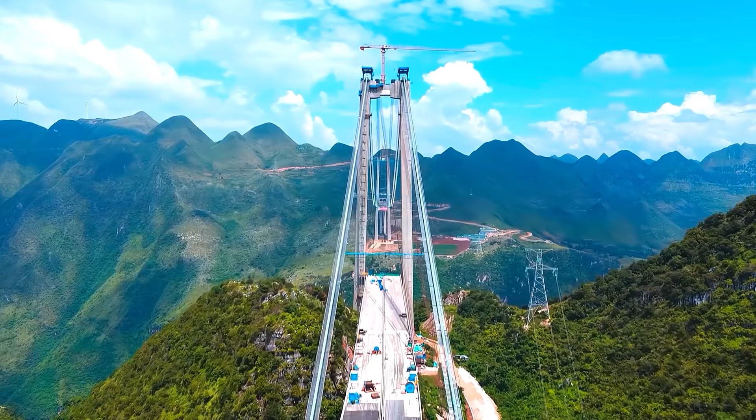Let's put this bridge's height into perspective. At 2,051 feet above the canyon floor, the Huajiang Bridge stands taller than 3 Washington monuments stacked on top of each other. If you dropped a bowling ball from the deck, it would take nearly 11 seconds to hit the ground. That's enough time to read this entire sentence twice. But this comparison only scratches the surface of what makes this bridge a true engineering wonder.

The bridge's location itself tells a fascinating story. Situated in China's Guizhou province, it spans one of the deepest canyons in Asia. The region's terrain is so challenging that for centuries, entire communities remained isolated from each other, separated by these natural barriers. Local legends tell of villages that could see each other across the canyon, but required a full day's journey to actually meet. The project began in 2013, with many experts claiming it couldn't be done.

The first challenge was simply surveying the site. Teams had to rappel down the canyon walls to take measurements and soil samples. Several geologists refused the job, calling the cliff faces too unstable. But a determined team pushed forward, spending 3 months mapping every inch of the canyon.

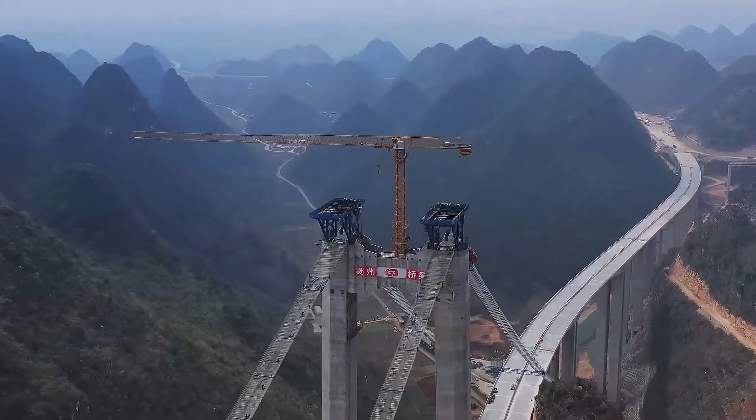But height isn't the only thing that makes this bridge extraordinary. The construction story behind it reads like an engineering thriller. The team faced 3 major challenges that nearly made this project impossible. First, the wind. At this height, gusts can reach speeds of over 100 miles per hour.

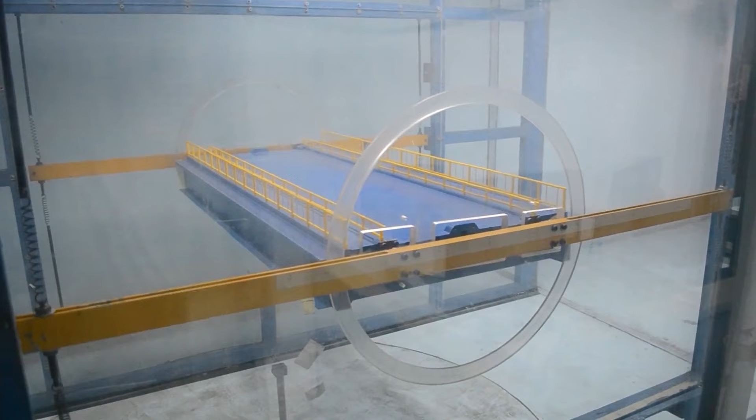Engineers had to design a deck that could handle these forces while staying stable enough for vehicles to cross. They developed a ground-breaking aerodynamic design that lets the wind pass through special vents, reducing pressure by 40% compared to traditional bridge designs. The testing phase alone took 6 months, with engineers using advanced wind tunnels to simulate every possible weather scenario. In one dramatic test, a scale model was subjected to hurricane-force winds for 72 continuous hours. Previous designs failed within the first day, with miniature sections buckling or twisting. The final design stood firm, swaying less than half an inch at the center span, a movement practically imperceptible to drivers crossing the actual bridge.

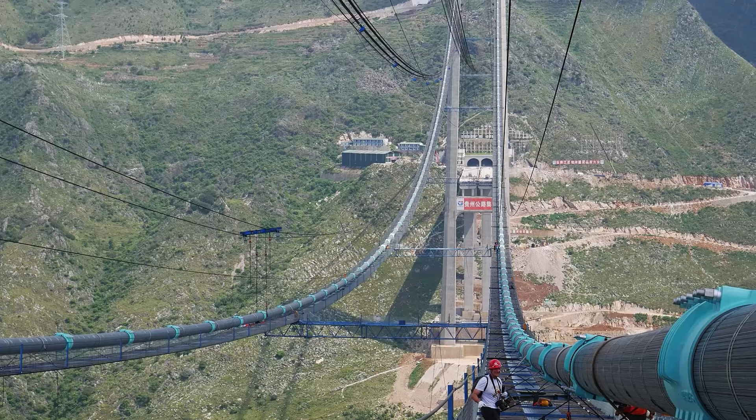This construction method required unprecedented precision. Each section had to be perfectly balanced as it extended out over the void. Special GPS systems were installed to track movement down to the millimeter. The slightest miscalculation could send thousands of tons of steel and concrete plummeting into the canyon below. On the day the 2 sides were scheduled to meet, engineers held their breath. The gap between the sections had to be within 3 centimeters to make the connection. Temperature changes overnight could expand or contract the steel, throwing off calculations. The team chose to make the final connection at dawn, when temperatures were most stable. When the sections aligned with only 2.2 centimeters difference, the construction crew erupted in celebration.

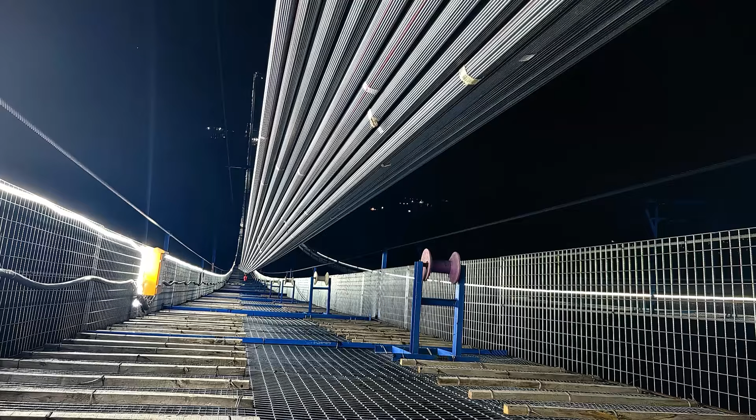But the most daunting challenge came from an unexpected source: temperature. The extreme height difference between the canyon floor and the bridge deck creates temperature variations of up to 30 degrees Celsius. This means different parts of the bridge expand and contract at different rates. The solution? A revolutionary expansion joint system that can move up to 2 meters in any direction, acting like a giant accordion to keep the bridge stable. These joints represent a breakthrough in bridge engineering. They contain special sensors that continuously monitor temperature, pressure, and movement.

The data is fed into a central computer system that predicts when and how the bridge needs to adjust. It's like giving the bridge its own nervous system.

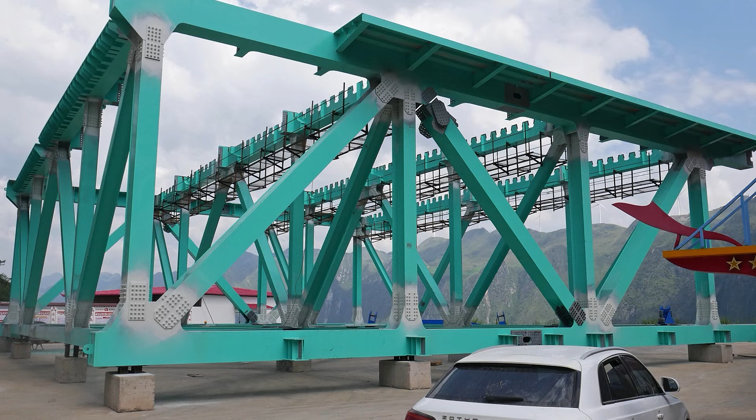The construction process pushed human ingenuity to its limits. Workers had to operate cranes at heights where oxygen levels are noticeably lower. Every steel cable and concrete pour had to be precisely calculated, since a mistake of even a few millimeters could spell disaster at this scale. The construction team developed new safety protocols that are now being adopted as standard practice for high-altitude construction worldwide.

The human stories behind this bridge are just as impressive as the engineering. Over 400 workers lived in temporary housing on the canyon rim for 3 years. Many were local villagers who had never worked on construction projects before. They received specialized training and now form an elite workforce deployed on other mega projects across China. One worker, Li Wei, started as a basic laborer and is now a sought-after specialist in high-altitude cable installation.

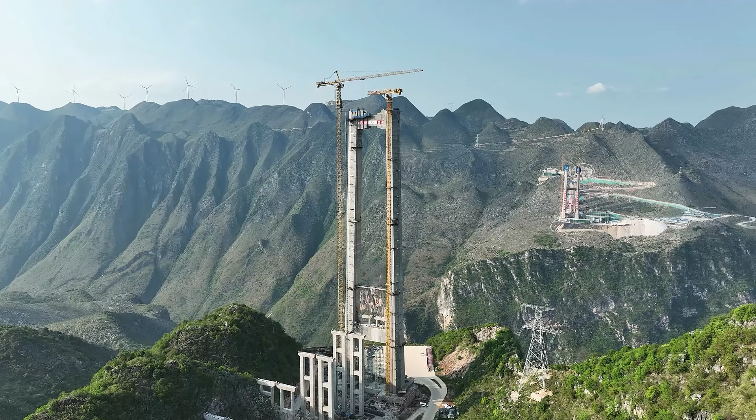The numbers behind this project are staggering. The main span stretches 1,140 feet across the canyon. The bridge deck contains enough steel to build 3 Eiffel Towers. The foundation pillars go so deep into the canyon walls that they could support a structure twice as heavy. Each main cable can withstand the weight of 360 fully loaded trucks.

The concrete used isn't ordinary either. Engineers developed a special high-strength mixture that can withstand extreme temperature changes and resist cracking under enormous pressure. This new formula is now being studied by construction companies around the world for use in other mega projects.

To test the durability of this concrete, researchers subjected sample blocks to pressures equivalent to being at the bottom of the ocean, then rapidly heated them to temperatures found in a blast furnace. Standard concrete would shatter under such conditions. The Huajiang mixture showed only microscopic stress fractures.

But here's what makes this bridge truly revolutionary. It's not just about crossing a canyon. The Huajiang Bridge is part of a larger network that's transforming China's rural regions.

Before this bridge, the journey around the canyon took over 4 hours. Now, just 7 minutes. Think about that change. A farmer can now reach markets in a fraction of the time. Students can access better schools. Emergency services can reach remote villages that were once almost inaccessible. This isn't just a bridge, it's a lifeline that's reshaping an entire region.

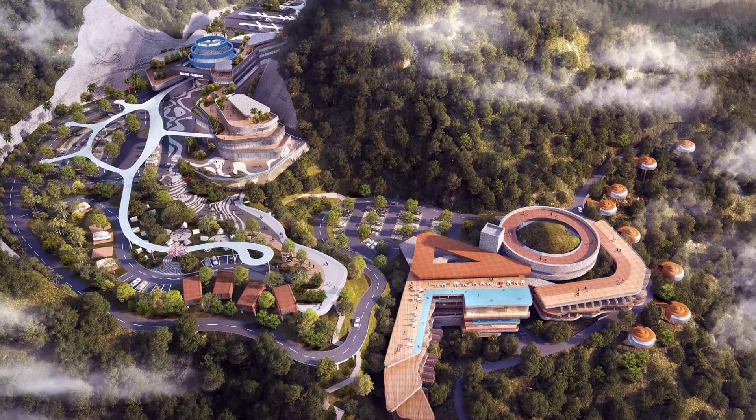The economic impact has been immediate and dramatic. Villages that were once considered too remote for tourism are now popular destinations. Local businesses report revenue increases of over 200% since the bridge opened. Property values in the surrounding areas have tripled. The bridge has literally put this region on the map.

One local entrepreneur, Ms. Jiang, converted her family home into a guest house. Before the bridge, she might see 2 or 3 visitors a month. Now she hosts over 100 guests weekly, many international tourists, coming specifically to see the bridge. Her story has been repeated across dozens of villages in the region.

The technology developed for this project is already influencing bridge design worldwide. Engineers from over 30 countries have visited the site to study its innovations. The special wind-resistant deck design is being adapted for bridges in other high-wind regions. The temperature compensation system is becoming a new standard for extreme environment construction.

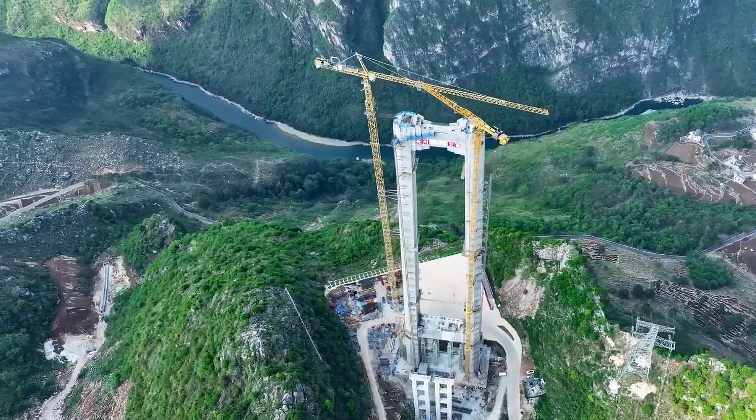But perhaps the most fascinating aspect is what this bridge represents for the future of engineering. We're entering an era where the impossible is becoming possible. The solutions developed for the Huajiang Bridge are paving the way for even more ambitious projects. Engineers are already talking about bridges that could span even greater heights and distances. The success of this project has opened up new possibilities.

If we can build a bridge this high, what other engineering challenges can we overcome? Could we build bridges across ocean trenches? Span entire mountain ranges? The Huajiang Bridge isn't just a record holder, it's a preview of what's coming next in the world of megastructures. Right now, somewhere in the world, engineers are looking at the Huajiang Bridge's success and asking themselves, what if we went even higher?

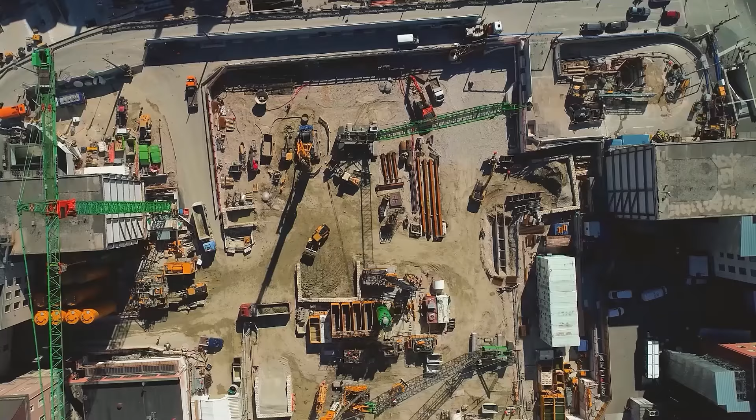Plans are already being drawn up for a bridge that could shatter this record. But the location and design of this potential new champion are being kept strictly under wraps. The only question is, how much higher can we go?

Imagine boring through solid rock beneath one of the world's mightiest rivers, creating a tunnel so massive you could fit a 5-story building inside it. Right now, beneath China's Yellow River, thousands of workers are creating the world's largest underwater tunnel using machines with the power of 26 million pound-feet of torque.

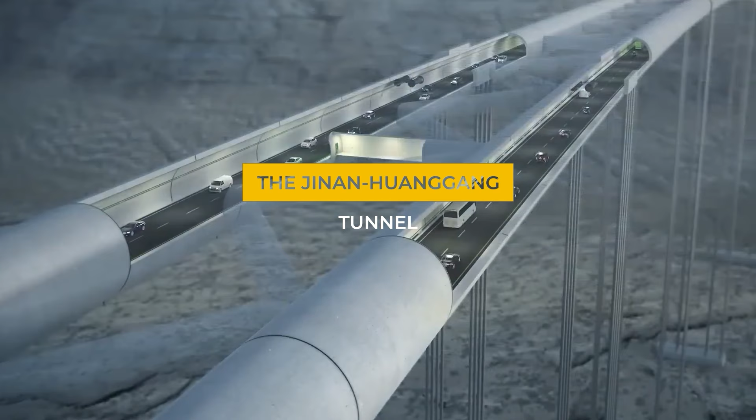While the world debates China's economic troubles, the communist regime is silently betting billions on a project that's shattering records for both size and speed. The Jinan Huanggang tunnel is rewriting the rules of what humans can build, and the pace at which they're building it raises serious questions about the true cost of China's infrastructure miracle.

China has always built big. The Great Wall, Three Gorges Dam, and the world's largest high-speed rail network all show China's obsession with infrastructure on an almost unimaginable scale. But those projects were built above ground, where construction challenges, while enormous, were at least visible and relatively understood. The Jinan Huanggang tunnel takes Chinese ambition to an entirely new level, or more accurately, a new depth.

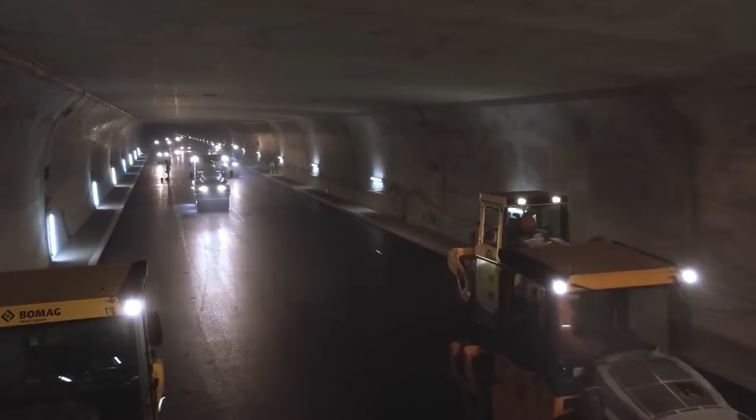This isn't just another road. This is a 3.6-mile engineering marvel being carved beneath the Yellow River, connecting the eastern city of Jinan with new development zones in Shandong province. For context, while not the longest underwater tunnel in the world, Japan's Seikan Tunnel stretches 33.5 miles, and the Channel Tunnel, connecting England and France, runs 31.4 miles.

The Jinan Huanggang Tunnel sets records in an entirely different dimension: size. The tunnel's diameter is a massive 55.8 feet, more than twice the size of the Channel Tunnel's 25-foot diameter tubes.

So why is China attempting something so ambitious? The answer lies in both economics and strategic development. The Yellow River has long been both the cradle of Chinese civilization and a natural barrier to transportation. As China's second longest river, it divides important regions and creates bottlenecks for commerce and transportation. The current route between areas north and south of the river requires vehicles to take significant detours or use congested bridges. This tunnel aims to cut travel time dramatically and open up new development opportunities.

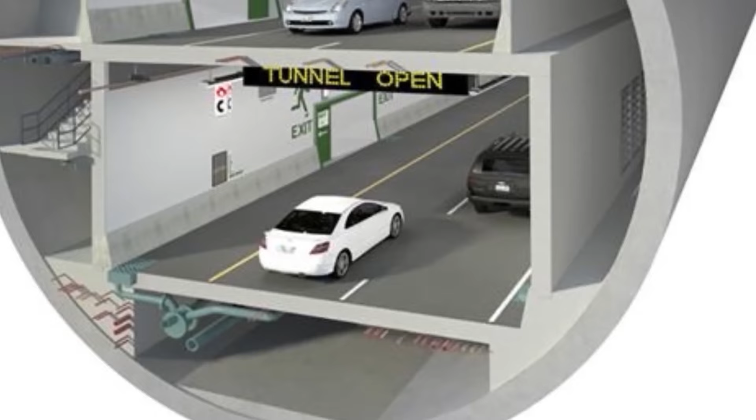The Jinan Huanggang Tunnel will feature 6 lanes of traffic in a revolutionary double-decker configuration, with northbound traffic on the upper deck and southbound on the lower deck. The design speed is 60 kilometers per hour, making it a crucial north-south passage that enhances connectivity between Jinan's main urban area and what Chinese authorities describe as the starting area for the transformation of new and old kinetic energy.

This project is especially significant for Jinan, a city of 9.4 million people and the capital of Shandong province. The tunnel connects the established urban core south of the Yellow River with a new state-level strategic pilot zone for free trade, innovation, and reform on the north side. Chinese planners view this connection as critical for economic integration and future growth in the region.

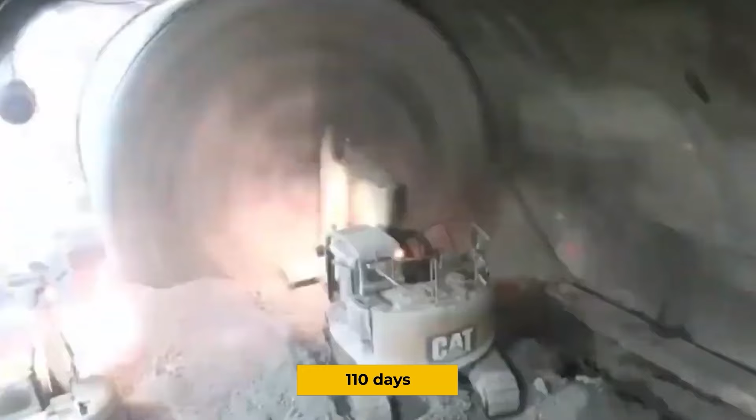Construction began in July 2022, with a groundbreaking ceremony held on the north bank of the Yellow River. The underwater boring portion started in September 2024. What's remarkable isn't just the size, but the speed. The China Railway 14th Bureau Group completed the underwater section in just 110 days, setting world records for both size and construction pace.

The total project spans approximately 5.8 kilometers, 3.6 miles, with the tunnel section about 4.8 kilometers, 3 miles long. The mechanized tunneling section using the Shield boring machine is approximately 3.3 kilometers, 2 miles long. This makes it substantially shorter than famous underwater tunnels like the Channel Tunnel, but its diameter and construction speed are what make it extraordinary.

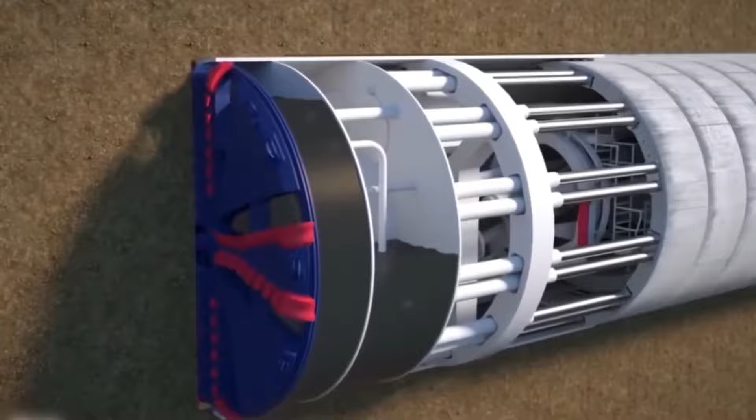To understand the true scale of this project, we need to look at the numbers. The main tunnels have an internal diameter of 15.4 meters, 50.5 feet, and an external diameter of 16.8 meters, 55.1 feet, wide enough for 3 lanes of traffic on each level. The geology presents major challenges: the tunnel must cut through clay, silty clay, sand, calcareous nodules, and glued sand, all while managing significant groundwater pressure.

The boring machine itself is an engineering marvel called Shanhe. Manufactured by Herrenknecht, this mixed-shield tunnel boring machine, TBM, has an excavation diameter of 57.4 feet, 17.5 meters, roughly 5 stories tall. The cutterhead has 7,510 horsepower and about 26 million pound-feet of torque. The cost of this single machine is estimated at $80 million.

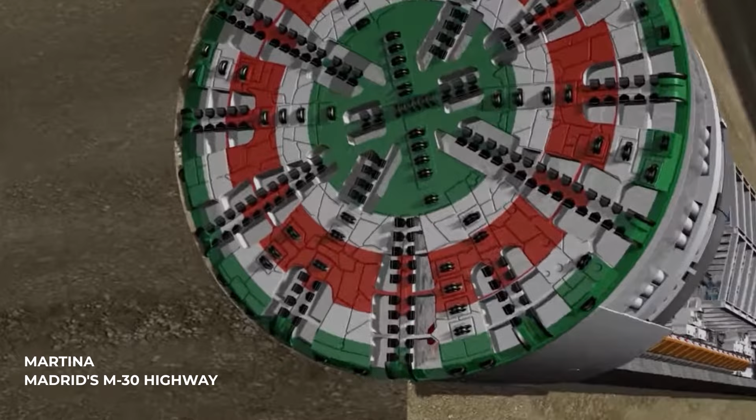This makes Shanhe one of the largest tunnel boring machines ever deployed, comparable to Big Bertha, used for Seattle's Highway 99 tunnel, and Martina, used in Madrid's M-30 highway project. The key difference is that Shanhe must operate beneath a major river with significant water pressure.

What makes the Shanhe TBM special is its ability to operate under extreme pressure. It's built to withstand up to 7.5 bar of pressure, 7.5 times normal atmospheric pressure at sea level, and its excavation chamber can handle up to 15 bar using a specialized automatic air cushion to balance pressure, maintain stability, and prevent collapse or flooding.

The tunnel boring process for a project of this scale is fascinating. The cutting wheel is equipped with a flushing system to help prevent clogging from the clayey soil. A telescopic camera system in the excavation chamber monitors the cutting bits and tunnel face, reducing the need for dangerous hyperbaric intervention by maintenance workers.

The machine advanced at a record-breaking pace of 52.5 to 59 feet, 16 to 18 meters per day, achieving a monthly progress of about 1,400 feet. This pace would have been considered impossible just a decade ago, but it raises important questions about the trade-offs between speed and safety.

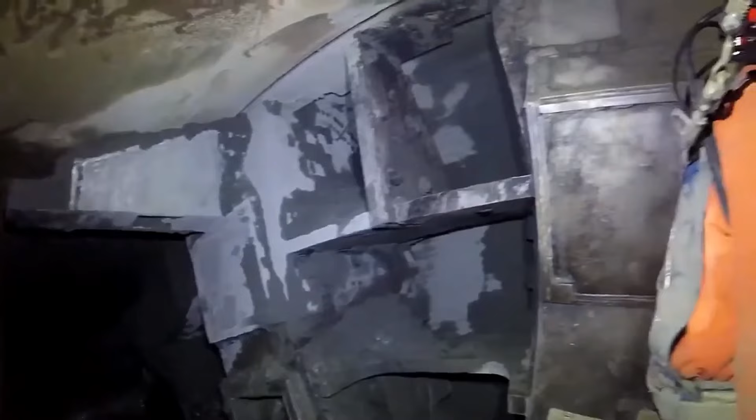The human dimension of this project shouldn't be overlooked. Thousands of workers are involved in this massive undertaking, working in shifts around the clock to maintain the ambitious schedule. Tunnel construction remains one of the most dangerous forms of infrastructure development, combining risks from heavy machinery, confined spaces, and unpredictable geological conditions. In China's drive for rapid development, worker safety concerns have often been secondary to project timelines.

While specific safety records for this project aren't publicly available, China's construction industry is known for higher accident rates than Western counterparts. Tunnel projects worldwide are among the most dangerous construction environments, with risks including cave-ins, flooding, toxic gas exposure, and machinery accidents. The engineering challenges extend beyond just boring the tunnel.

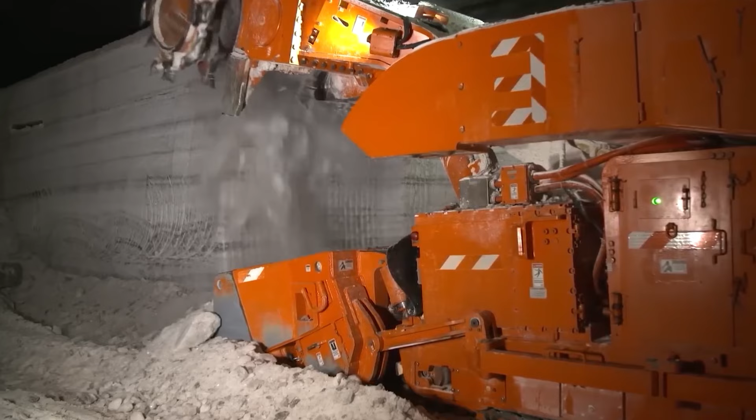The shield segments, the interlocking concrete rings that form the tunnel walls, must be precisely manufactured and installed. For the Jinan Huanggang tunnel, approximately 500 pipe rings of underwater shielding were installed during the 110-day underwater boring phase.

Each of these massive concrete segments must be designed to withstand not just the pressure of the water and earth above, but also potential seismic activity. The Yellow River Basin has experienced earthquakes throughout its history, and any tunnel design must account for ground movement that could damage or breach the structure.

The environmental challenges are also significant. The Yellow River is ecologically sensitive and prone to flooding and sedimentation, earning it the nickname China's Sorrow for its historic tendency to flood and change course. Any major construction project affecting the river requires careful management of both immediate impacts and long-term stability.

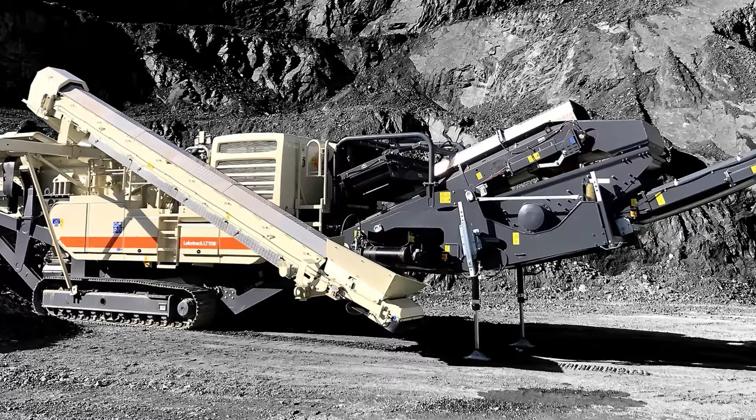Engineers developed innovative waste slurry treatment methods, including jaw crushers, dual-line pipeline hydraulic quarrying devices, and waste slurry concentration systems to ensure environmentally friendly tunneling. This aspect of the project highlights China's growing awareness of the need to balance rapid development with environmental protection, though critics would argue that environmental concerns remain secondary to project completion.

The Jinan Huanggang Tunnel project is being constructed by the China Railway 14th Bureau Group Company Limited, one of China's premier infrastructure development companies, with investment from the Jinan Urban Construction Group. This public-private partnership model is common for major infrastructure projects in China, combining government backing with corporate efficiency.

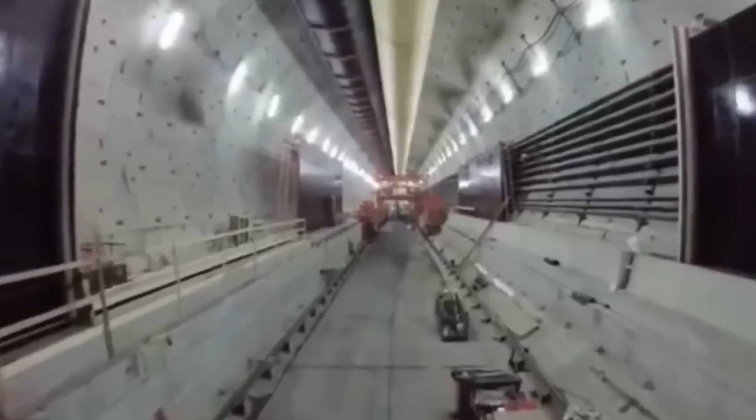Despite the challenges, the Chinese government has continued to push the project forward with remarkable speed. This raises an important question: is this tunnel worth the enormous financial and human cost? From an economic perspective, Chinese authorities clearly believe the investment will pay off through improved transportation efficiency and regional development. The tunnel connects Jinan's urban core with strategic development zones, potentially catalyzing economic growth across the region.

The project also fits within China's broader strategy of using infrastructure investment to maintain economic growth as traditional drivers, like export manufacturing and real estate development, slow down. Infrastructure spending has become increasingly important for maintaining employment and GDP growth targets, especially in the aftermath of economic disruptions from the COVID-19 pandemic. The Jinan Huanggang Tunnel showcases China's growing expertise in infrastructure megaprojects.

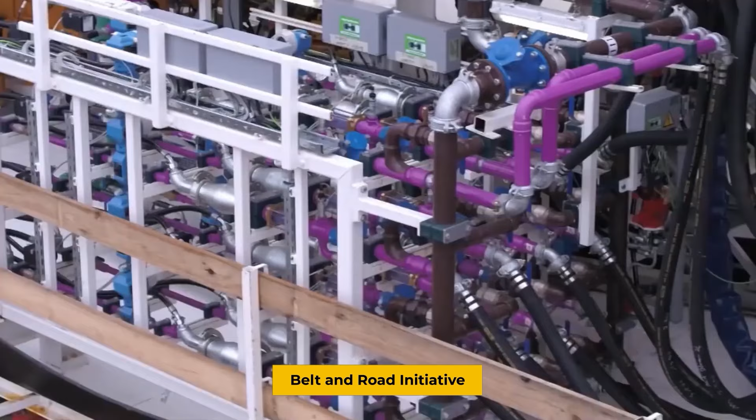The technology and techniques developed for this tunnel have applications far beyond China's borders. Chinese construction firms are actively marketing their tunneling expertise internationally, particularly to countries participating in the Belt and Road Initiative. This represents a sophisticated form of economic diplomacy, exporting not just products, but entire infrastructure development systems. As Chinese firms gain experience with projects like the Jinan Huanggang Tunnel, they become more competitive for international contracts, extending China's global influence through infrastructure partnerships.

The tunnel project showcases several technological innovations. The massive diameter required specialized engineering solutions not used in previous tunnel projects. The composite lining materials must balance strength with flexibility, particularly in an area that could experience seismic activity.

Air quality management represents another major engineering challenge. A tunnel of this size requires massive ventilation systems to remove vehicle emissions and maintain oxygen levels. Complex fire suppression and emergency evacuation systems are being integrated to ensure safety once the tunnel is operational.

When completed, the tunnel will incorporate state-of-the-art traffic management systems, including sensors to monitor vehicle flow and environmental conditions, automated incident detection, and dynamic message signs to communicate with drivers. Modern tunnels are as much about information technology as they are about concrete and steel.

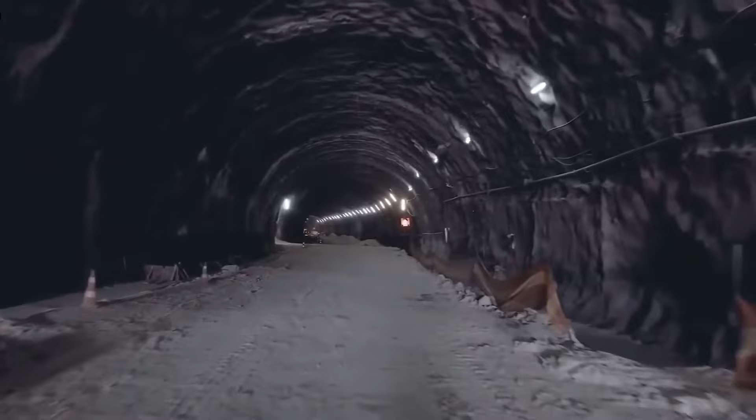The total cost of the Jinan Huanggang tunnel project hasn't been publicly disclosed, but based on comparable projects, experts estimate it at several billion dollars. For comparison, the much longer but narrower Channel Tunnel cost approximately $21 billion in today's dollars.

Maintenance costs will be substantial once the tunnel is operational. Underground infrastructure, especially beneath rivers, requires constant monitoring and periodic renovation to address water infiltration, structural fatigue, and systems degradation. The anticipated service life of modern tunnels is typically 100+ years, but this assumes regular maintenance and periodic major renovations.

The project is scheduled for completion in late 2025, though infrastructure projects of this scale often face delays. Once operational, it will dramatically transform transportation in Jinan and set new benchmarks for infrastructure projects worldwide.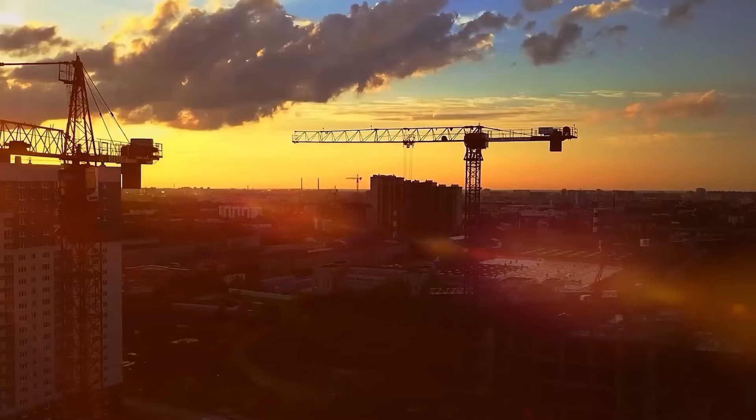The Jinan Huanggang Tunnel represents more than just a transportation link. It's a statement about China's engineering capabilities and determination to overcome natural barriers through human ingenuity. While questions remain about the economic rationality and safety of such rapid construction, there's no denying the technical achievement it represents.

As cities worldwide grapple with transportation challenges and natural barriers, projects like this offer valuable lessons about the possibilities and limitations of modern infrastructure development. The techniques developed for the Jinan Huanggang Tunnel could influence underground construction for decades to come, potentially making previously impossible infrastructure connections feasible.

As the Jinan Huanggang Tunnel inches toward completion, engineers have encountered unexpectedly high pressure zones that are testing the limits of even the mighty Shanhe machine.

The race to finish by late 2025 raises a critical question: is China prioritizing propaganda deadlines over engineering prudence? What's happening beneath the Yellow River might be the ultimate test of whether breaking speed records and breaking safety standards go hand in hand. And the answer could permanently change how we view China's infrastructure miracle.

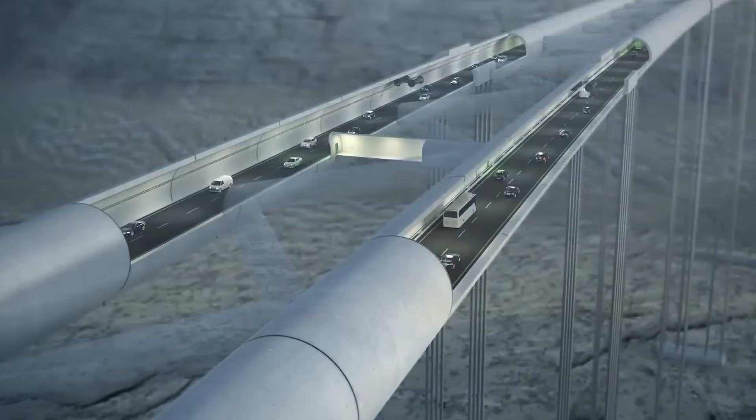What if ships could sail over mountains? China didn't ask, what if? They built it. The Goupitan Shiplift, a $7.7 billion mega elevator that hauls 10,000-ton ships, each as tall as a 66-story skyscraper, a jaw-dropping 199 meters into the sky, like a floating titan defying gravity itself.

But why build this monster in the first place? The answer reveals a masterclass in strategic thinking that goes far beyond simply moving cargo from point A to point B. China's inland trade faces a brutal challenge: mountains, cliffs, and unpredictable terrain.

Nowhere is this more obvious than the Wujiang River in Guizhou province, a region where traditional transport methods are slow, expensive, and often dangerous. The geography here isn't just challenging, it's hostile. Sharp limestone peaks erupt from the landscape like dragon's teeth.

Narrow valleys plunge hundreds of meters below. Monsoon seasons transform gentle streams into raging torrents. For centuries, this region was known as the mountain that devours men, due to its treacherous passages and deadly landslides.

Before the ship lift, moving cargo through this labyrinth of rock and water was nearly impossible. Ships had no path forward. Trucks crawled along crumbling roads, barely holding their ground against landslides.

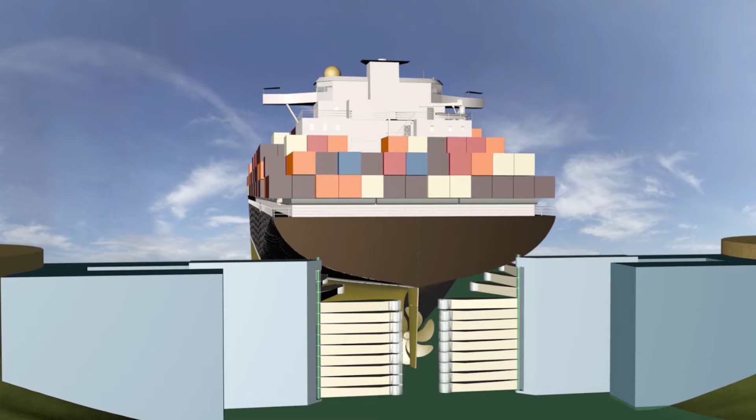Traditional canal locks, which have worked in other parts of the world, were too slow and impractical for this extreme landscape. A conventional lock system would have required an endless chain of at least 20 separate chambers to navigate the nearly 200-meter elevation change. The economic cost was devastating.

Shipping a single container from Guizhou to Shanghai could take up to 2 weeks and cost 3 times more than comparable distances elsewhere in China. Local industries suffered. Foreign investment avoided the region entirely.

An entire province with 36 million people, larger than most European countries, remained economically isolated in one of the world's fastest-growing economies.

So China did something radical. Instead of forcing the river to adapt to trade, they made trade adapt to the river. That's where the Goupitan ship lift comes in, a machine so powerful it compresses 4 days of travel into just 2.5 hours.

Imagine a ship the size of a football field entering a colossal steel chamber. The gates slam shut, sealing it inside with precision-engineered hydraulic doors weighing 400 tons each. Then, the magic begins. Massive pumps roar to life, flooding the chamber with water, cradling the vessel in a liquid elevator.

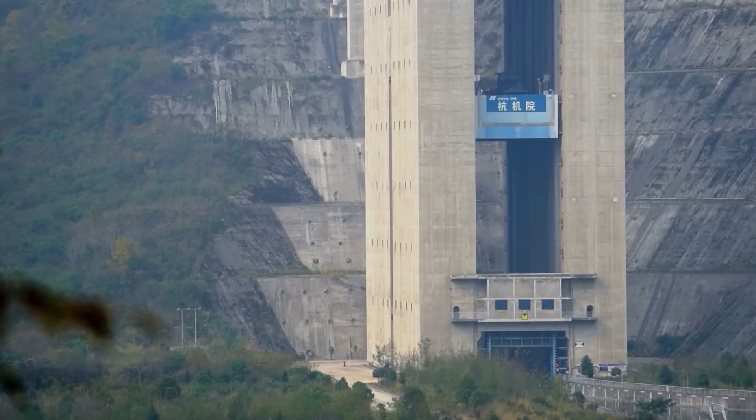The chamber itself weighs 3,000 tons empty, but with water and a fully loaded cargo ship, this weight balloons to over 11,000 tons. Slowly, the entire structure rises, straight up, as if the river itself is lifting it over the mountain.

The ship ascends, climbing higher than the Statue of Liberty and the Great Pyramid of Giza combined. From inside the ship, the experience is surreal. The ground falls away, the world outside shrinking like a disappearing valley. Through small portholes in the chamber walls, passengers can glimpse the shrinking landscape below. River becomes ribbon, villages become specks.

The vast scale of the surrounding mountains becomes apparent only when you're halfway up their imposing faces. When the chamber reaches the upper reservoir, the forward gates open to reveal a new world, a sprawling lake where just minutes before there was nothing but air. The ship glides forward, continuing its journey as if it hadn't just performed an engineering miracle. It's not just a shortcut, it's a game changer, a river highway carved into the sky.

At the heart of this machine is a floating fortress, a colossal ship chamber, 40 meters long and 12 meters wide, holding 500 tons of steel and water. But how do you lift something this massive without disaster? The answer lies in raw mechanical power and surgical precision.

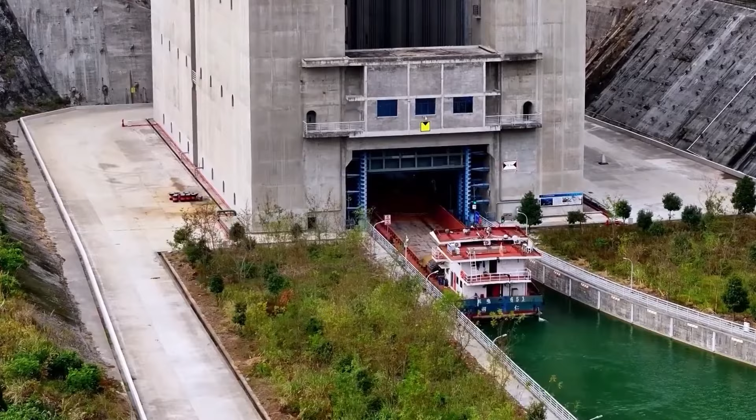The chamber moves along 4 massive concrete towers that function as both guide rails and structural support. These towers are anchored deep into the bedrock, with foundations extending 70 meters below the visible structure. Each tower contains redundant systems of cables, counterweights, and emergency brakes.

256 steel cables, each strong enough to tow a jumbo jet, guide the chamber along a gear rack climbing system. These aren't ordinary cables. Each is composed of 127 individual strands of high tensile steel, twisted together in a precise pattern that maximizes strength while minimizing weight. If laid end to end, the cables would stretch over 80 kilometers.

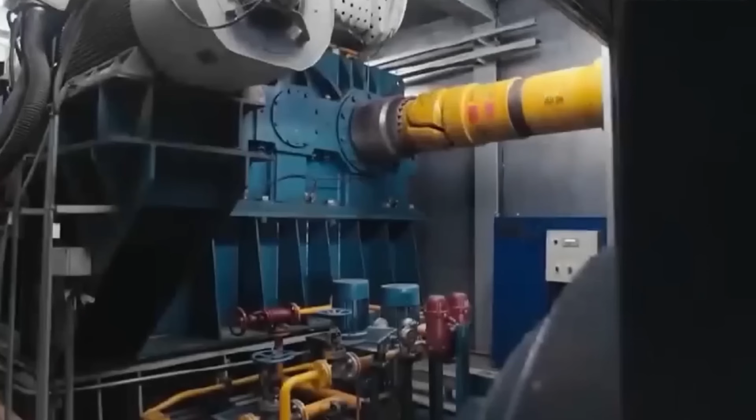Interlocking metal teeth lift the entire structure vertically, like a skyscraper-sized cogwheel. These teeth must engage perfectly on every cycle, with tolerances measured in millimeters despite the enormous forces involved. The teeth are made from a special alloy that's both incredibly hard yet flexible enough to absorb micro vibrations that would otherwise damage the system.

A nut column safety system absorbs the violent shockwaves from winds, waves, and even earthquakes. The lift must stay perfectly balanced, even under the tremendous weight of ships and turbulent water pressure. Sensors throughout the structure constantly monitor for the slightest imbalance, automatically adjusting the lifting mechanism to compensate. Counterweights and hydraulic dampers help stabilize the motion, ensuring that even with millimeter-level precision, the system doesn't buckle under pressure.

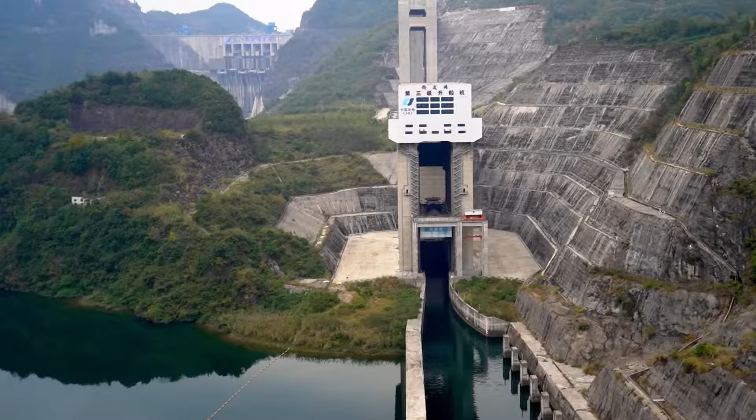The dampers themselves contain enough hydraulic fluid to fill an Olympic swimming pool and can absorb forces equivalent to a small meteorite impact. The power requirements are staggering. The lift consumes enough electricity to power a small city, though much of this is generated by the dam's own hydroelectric turbines. Backup generators can provide emergency power sufficient to safely lower the chamber in case of a grid failure.

Every cycle is a high-stakes ballet of physics and engineering. One miscalculation, and the entire 10,000-ton mass could slam into the structure with catastrophic force. The control systems feature quintuple redundancy. 5 separate computers continuously check each other's calculations, with any disagreement triggering an immediate safety protocol.

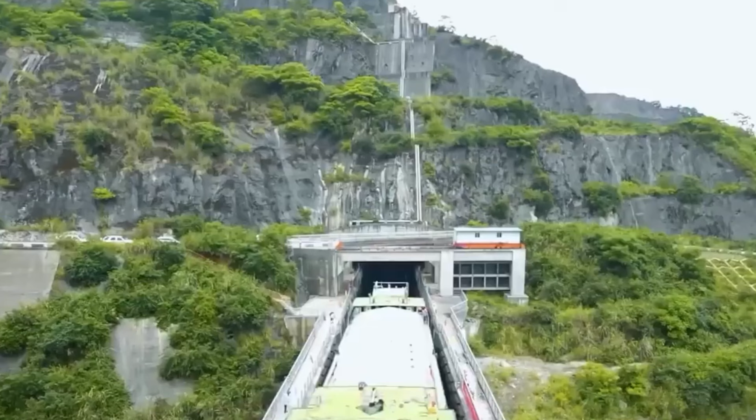Each lifting cycle takes just 30 minutes. In 2.5 hours, an entire mountain range is bypassed. The system can complete up to 24 full cycles per day, moving nearly 5 million tons of cargo annually. A massive shortcut, a game changer for China's trade routes.

But efficiency wasn't the only goal. This project had a far bigger agenda. At first glance, the Gupitan ship lift seems like a futuristic way to move cargo. But beneath the surface, it reveals a much deeper strategy, one that rewrites the economic map of China.

For decades, Guizhou province was a logistical dead zone, its economy trapped by the same mountains that made transport nearly impossible. Industries struggled, trade crawled, entire regions were cut off from prosperity. The province consistently ranked among China's poorest, with per capita GDP less than a third of coastal regions.

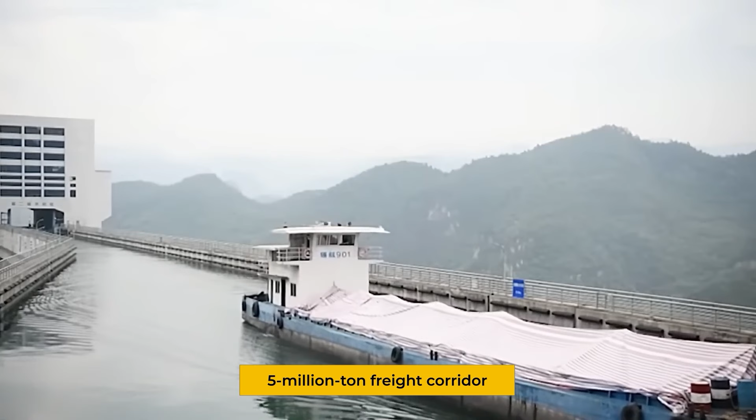Now, that's changed. With this vertical water highway, Guizhou is directly linked to China's economic backbone, the Yangtze River. The result? A 5 million ton freight corridor that slashes costs, accelerates trade, and turns a once-forgotten region into a key economic hub. The numbers tell the story.

Since the lift's completion, shipping costs from Guizhou have dropped by 67%. Industrial output has increased by 42%. Foreign investment has surged by 83%. Previously uneconomical industries, from advanced manufacturing to agriculture, are suddenly viable. A province once known for subsistence farming now hosts technology parks and export zones.

Villages that once clung to existence now thrive as service centers for the new shipping corridor. Thousands of jobs have been created, not just in shipping, but in maintenance, logistics, and supporting industries. Tourism itself has boomed, with the lift becoming a destination for both domestic and international visitors fascinated by this engineering wonder. But here's the bigger picture.

This isn't just about regional development, it's about fortifying China's domestic supply chains. Imagine if international shipping lanes were suddenly disrupted. Ports close, sanctions tighten, global trade grinds to a halt. How does China keep its economy moving? That's where massive inland infrastructure like this becomes critical.

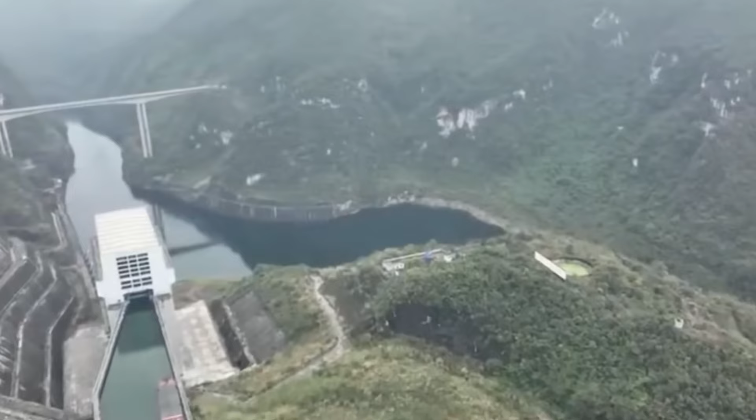The Gupitan ship lift is part of a broader network that includes the Three Gorges Dam, the south to north water transfer project, and thousands of kilometers of inland waterways. Together, they form an internal circulation system, one that can keep goods flowing even if external arteries are severed. This isn't merely speculation. China's dual circulation economic policy explicitly prioritizes developing resilient domestic supply chains that can function independently of global systems if necessary.

Projects like the Gupitan ship lift are physical manifestations of this strategy. While the world obsesses over China's skyscrapers, bullet trains, and megacities, it's the hidden supply chains, the ones buried in the mountains and rivers, that might determine its future. These projects receive less international attention, but may ultimately prove more consequential.

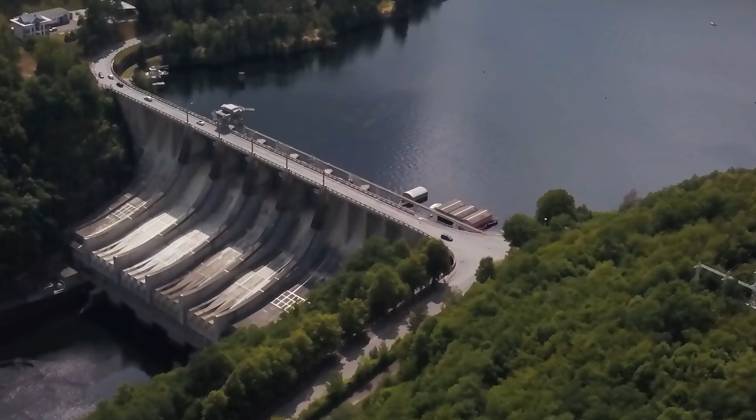The ship lift also represents a powerful geoengineering approach to climate adaptation. As weather patterns become more extreme, water management becomes increasingly crucial. Systems like the Gupitan ship lift help regulate water flow, prevent flooding, and ensure continued navigability despite changing rainfall patterns.

This ship lift isn't just a machine, it's an insurance policy, a chess move in a global economic game, a physical manifestation of China's long-term strategic thinking. So was this built for efficiency or to future-proof China against global uncertainty? The answer, increasingly, appears to be both.

China's Gupitan ship lift isn't just an engineering marvel, it's a statement. A $7.7 billion vertical highway that bends mountains to its will, slashes trade routes, and reshapes entire regions. But it's also just one piece of a much larger puzzle.

Similar projects are already under construction throughout China's western provinces. The technology developed for Gupitan is being refined, scaled, and expanded. Future lifts may be even taller, faster, and more efficient. Moreover, this expertise is becoming an export product itself.

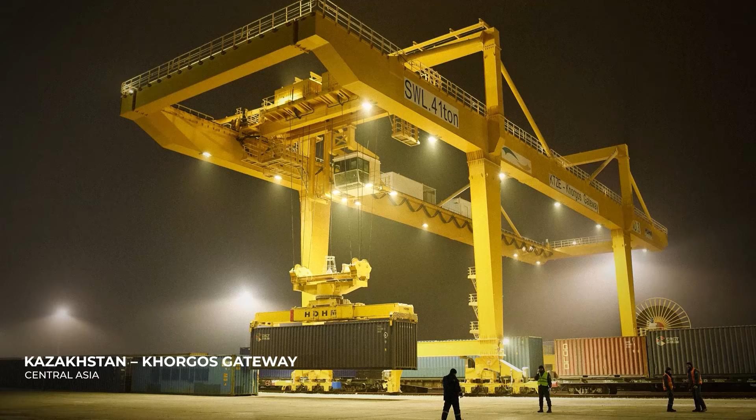Chinese engineers who worked on Gupitan are now consulting on similar projects in Southeast Asia, Central Asia, and Africa as part of the Belt and Road Initiative. The knowledge gained from one impossible project fuels dozens more. If China can pull this off, what's next?

Because while the world watches their skyscrapers rise and bullet trains blur, it's what's happening beneath the surface, the hidden infrastructure, that might change everything. And if this is just a piece of a larger plan, how far is China willing to go?

$5.5 billion, 16,400 feet above sea level, 550 kilometers of strategic highway. Here's the blueprint for China's next power move in Asia. A massive highway is being carved through the Himalayas, creating a direct pipeline for Chinese influence straight to India's doorstep. What looks like infrastructure is actually a geopolitical weapon. While the world watches elsewhere, Beijing's newest alliance-building strategy unfolds in the world's highest mountains, and it could reshape the global power balance forever.

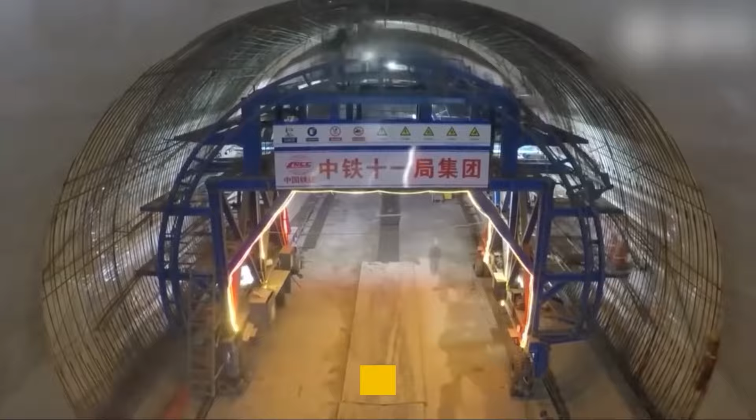The Trans-Himalayan Highway, also known as the China-Nepal Highway, stretches approximately 550 kilometers from Lhasa, the capital of Tibet, to Kathmandu, Nepal's capital city. But the true engineering challenge lies in the final 100 kilometers, a section that crosses the Himalayas through terrain previously considered impassable by modern roads.

Let's put this in perspective. The highway crosses multiple passes above 5,000 meters, that's over 16,400 feet. At these elevations, atmospheric pressure drops to nearly half of what you experience at sea level. Workers need supplemental oxygen. Construction equipment performs at reduced capacity. Avalanches, landslides, and extreme temperature fluctuations are constant threats.

The cost? Current estimates put it at $5.5 billion. But like many Chinese megaprojects, the final price tag will likely be much higher. Construction began in 2019, with sections already operational, and the entire highway is scheduled for completion in 2026.

What makes this project different from other mountain roads is its classification as a true highway, designed for high-speed, high-volume transportation with multiple lanes, tunnels through the highest peaks, and dozens of major bridges spanning deep valleys. When completed, what once took a week of treacherous mountain driving will be reduced to approximately 10 hours. Building at the roof of the world brings unprecedented challenges.

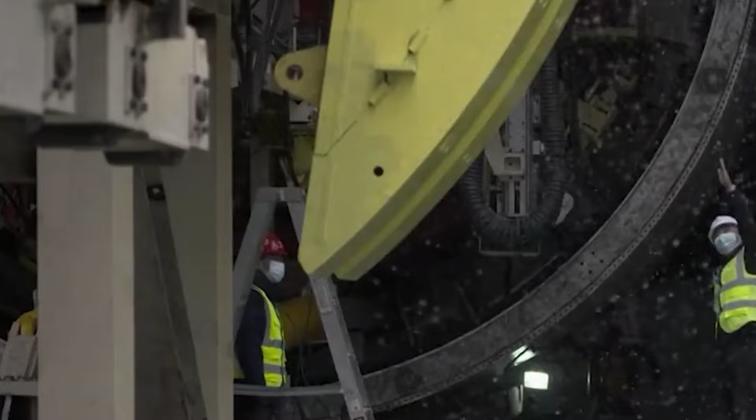The Trans-Himalayan Highway passes through a region known for its geological instability. The Himalayan range isn't just tall, it's young and still growing, rising several millimeters each year as the Indian tectonic plate continues its collision with the Eurasian plate. This active geology means Chinese engineers face constant battles with unstable mountainsides, frequent earthquakes, and unpredictable weather patterns.

In 2015, Nepal experienced a devastating 7.8 magnitude earthquake that killed nearly 9,000 people. Any infrastructure in this region must be built to withstand similar events. The engineering solutions are as ambitious as the project itself.

To overcome the most challenging sections, China is employing tunnel boring machines specially modified for high-altitude operations. These massive machines, some as long as a football field, are cutting through solid mountain rock at elevations where the reduced oxygen makes conventional equipment struggle.

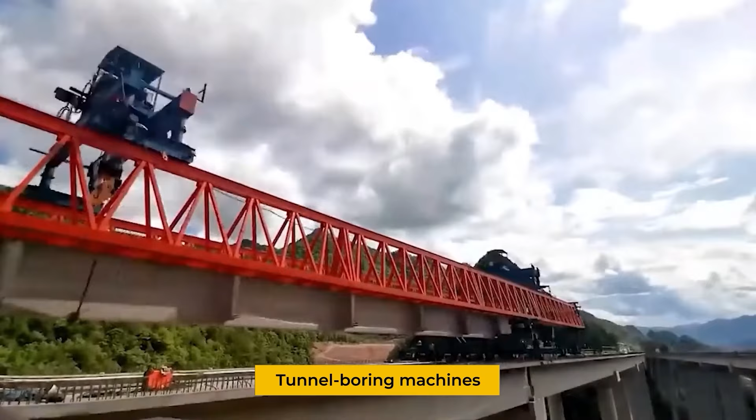Elevated roadways float above unstable terrain. Rather than cutting into avalanche-prone slopes, many sections are being built on pillars, allowing snow and debris to pass underneath.

A network of climate-controlled way stations provides emergency services, oxygen supplies, and shelter from extreme weather conditions. Specialized concrete mixtures are designed to withstand extreme temperature fluctuations, since regular concrete would crack and fail under the daily freeze-thaw cycles experienced at these elevations.

One of the most impressive features is the Gairong Tunnel, a 10-kilometer passage being drilled directly through Mount Everest's neighboring peaks. When completed, it will be among the highest major tunnels in the world, with a maximum elevation of over 5,300 meters inside the mountain.

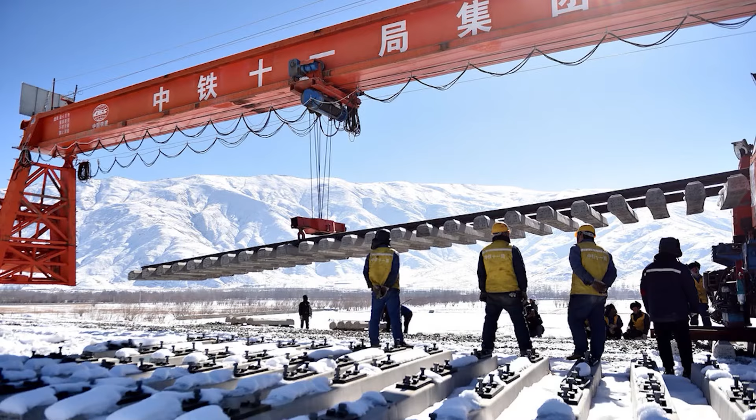The project employs over 2,000 workers, many of whom must undergo high-altitude conditioning before beginning their rotations. Living and working conditions are extreme, with temperatures ranging from minus 40 degrees Celsius in winter to 30 degrees Celsius in summer.

To understand why China is investing billions in this highway, we need to look beyond engineering and focus on geopolitics. The Trans-Himalayan Highway represents something much more significant than a road. It's a strategic move in China's long game for regional dominance.

For centuries, the Himalayas have served as a natural buffer between China and the Indian subcontinent. This massive mountain range has limited trade, cultural exchange, and, importantly, military movements between these ancient civilizations. The new highway effectively punches a hole through this buffer.

For Nepal, the highway offers an economic lifeline. As a landlocked nation, Nepal has historically been dependent on India for access to the sea and international markets, with nearly 80% of Nepal's imports traditionally coming through India. The Trans-Himalayan Highway changes this equation dramatically, giving Nepal direct access to Chinese ports and reducing its economic dependence on India.

This shift is already visible in Nepal's politics. Since construction began, Nepal has signed multiple trade and transit agreements with China, including deals that allow Nepal to use Chinese ports for third-country trade. This marks a significant pivot away from its traditional reliance on India.

From India's perspective, the highway represents a serious strategic concern. India and China have a complicated relationship marked by a long-standing border dispute that erupted into armed conflict as recently as 2020 in the Galwan Valley. The Trans-Himalayan Highway potentially allows China to move military assets close to the Indian border much more rapidly than before.

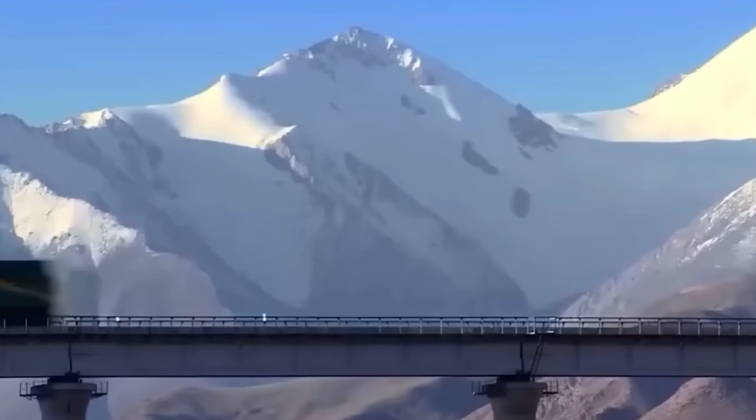Perhaps the most significant aspect of this project is its role in China's broader Belt and Road Initiative, BRI. Launched in 2013, the BRI aims to connect China with countries across Asia, Africa, and Europe through a network of roads, railways, ports, and other infrastructure projects.

The Trans-Himalayan Highway represents a critical link in this network, opening new trade routes that bypass traditional sea lanes controlled by the United States and its allies.

Beyond geopolitics, the Trans-Himalayan Highway promises to reshape economic realities across the region. Currently, trade between China and South Asia is constrained by geography. Goods must either travel by ship through the Malacca Strait and the Indian Ocean, a journey of weeks, or take limited land routes through Pakistan or Myanmar.

The new highway could reduce transportation times between Lhasa and Kathmandu from days to hours. This efficiency gain translates directly into economic opportunity, potentially increasing China-Nepal trade from the current $1.5 billion annually to over $10 billion within a decade after completion.

For China, the highway also serves domestic economic goals. Tibet, despite massive infrastructure investment, remains one of China's poorest regions. The highway connects Tibet more closely with markets to the south, potentially stimulating local industries and tourism.

Chinese officials have specifically highlighted how the project will help alleviate poverty in Tibet's border regions. The economic ripple effects extend beyond the immediate region. Bangladesh, Bhutan, and northern India could all see increased Chinese trade and investment flowing through this new corridor. Chinese companies are already positioning themselves to build industrial parks and special economic zones near the highway's southern terminus.

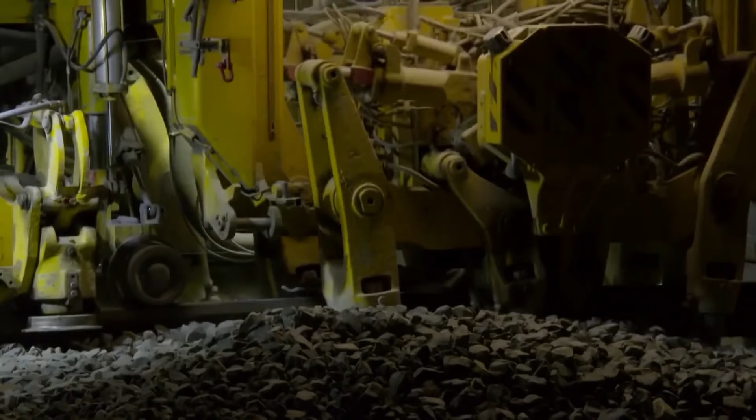Environmental experts have raised serious concerns about the Trans-Himalayan Highway's impact on this fragile ecosystem. Construction activities have already triggered landslides in several areas. The highway cuts through previously remote regions, bringing pollution, noise, and human activity to pristine environments.

Of particular concern is the project's potential impact on water security. The Himalayas are the source of 10 major river systems, including the Ganges, Indus, Yangtze, and Yellow rivers. Disruption to natural water flows could have downstream consequences for billions of people who depend on these river systems for agriculture and drinking water.

Climate change is already affecting the region, with Himalayan glaciers melting at accelerating rates. Some environmental scientists warn that large-scale infrastructure projects like the highway could exacerbate these effects, creating a feedback loop of environmental degradation. Chinese officials counter these concerns by pointing to environmental protection measures incorporated into the highway's design.

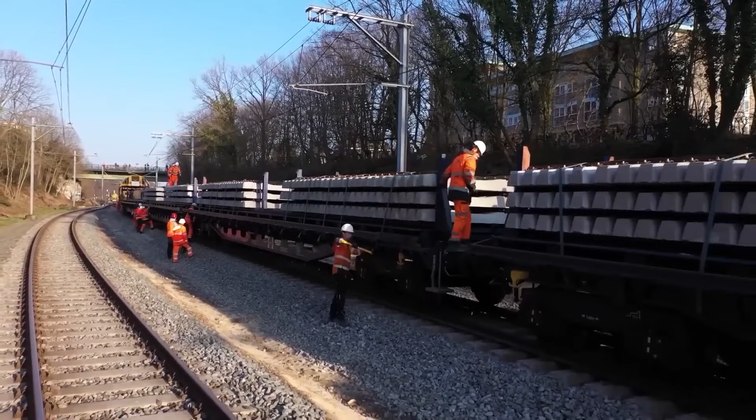These include wildlife crossings, reforestation efforts, and slope stabilization techniques designed to minimize erosion. They argue that improved access will actually help conservation efforts by making it easier to monitor and protect remote areas. However, independent environmental assessments have been limited, with restricted access to construction zones making it difficult to verify these claims. Environmental groups continue to push for greater transparency and more rigorous impact studies.

As we look to the future, the Trans-Himalayan Highway raises profound questions about the changing dynamics of Asia. This single infrastructure project embodies larger trends reshaping the continent: China's rising influence, shifting alliances, the tension between economic development and environmental protection, and the evolving relationship between geography and power.

For Nepal and other small states in the region, the highway presents both opportunity and challenge. Greater connectivity promises economic benefits, but also increases vulnerability to external pressures. Maintaining sovereignty and strategic autonomy while benefiting from Chinese investment will require skillful diplomacy.

India faces perhaps the most complex strategic calculations. Does it attempt to counter China's infrastructure push with projects of its own? Does it accept a diminished role in Nepal and focus on other priorities? Or does it seek accommodation with China, finding ways to benefit from the new connectivity while protecting core interests?

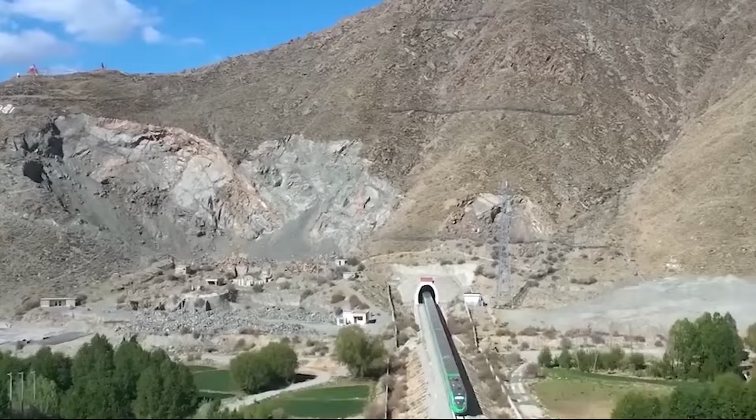For China, the highway represents another step in its transformation from a regional power to a global one. By reshaping the physical landscape, China is also reshaping political realities. The ability to project economic and potentially military power across the Himalayas fundamentally alters strategic equations that have held for generations.

The Trans-Himalayan Highway also offers a window into a future where infrastructure increasingly serves as a tool of statecraft. In a world where traditional forms of power projection face growing constraints, the ability to build connections, physical, economic, and political, becomes increasingly valuable.

The machines continue their work in the thin Himalayan air, cutting through rock that has stood for millions of years. With each kilometer of pavement laid, the balance of power in Asia shifts slightly. What was once impossible becomes inevitable. The mountains that have separated civilizations for millennia are being bridged.

But here's the question that keeps military planners and geopolitical analysts awake at night: if China can build a highway through the world's highest mountains in just a few years, what else might be possible?

A train just broke the sound barrier of ground transportation. China's new maglev can hit 620 miles per hour, faster than a Boeing 737 at takeoff. While the rest of the world argues about electric cars, China built a train that makes airplanes look slow.

But here's what nobody's talking about: this technology might not even be Chinese. And the real story behind this machine could change how every country thinks about the future of travel.

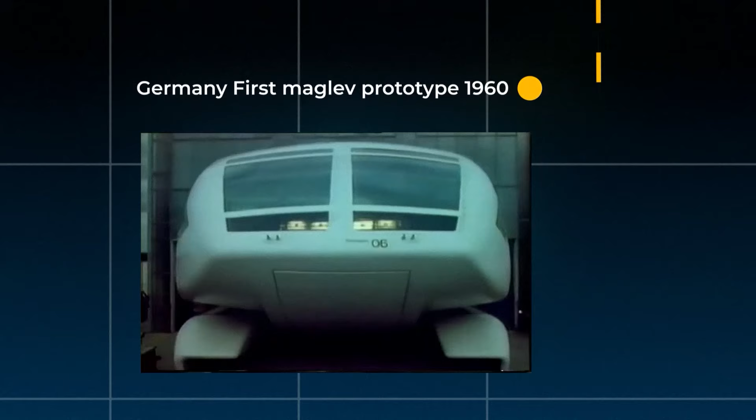But speed is just the beginning of this story, and here's where things get complicated. Maglev technology wasn't invented in China — it was developed in Germany in the 1960s. German engineers created the first working maglev systems. They built test tracks and prototype trains decades before China entered the game.

The Transrapid system in Germany could reach 268 miles per hour back in the 1980s. German companies spent billions developing this technology. They had working systems while most countries were still using diesel trains from the 1950s. But Germany made a critical mistake — they never scaled up production. Political debates about cost and environmental concerns slowed development, and the technology remained trapped in research facilities and short test tracks.

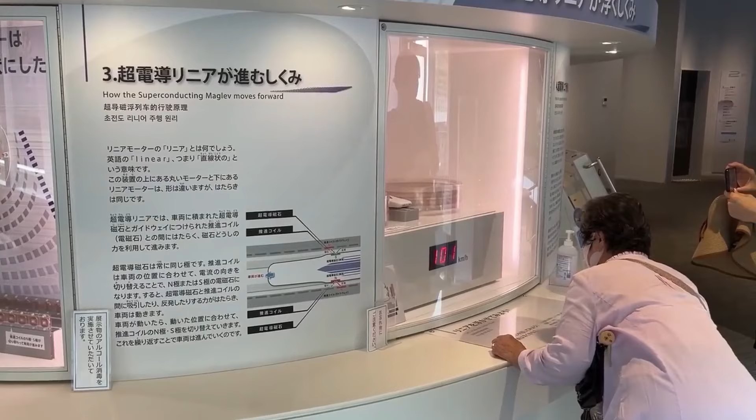So how did China end up with the world's fastest maglev? The answer involves technology transfer deals, joint ventures, and what some engineers call strategic acquisition of foreign expertise. In the early 2000s, China needed to upgrade its transportation system fast. They invited German companies to build maglev systems in China. The deal seemed simple: Germans would provide the technology, Chinese companies would handle construction. Both sides would benefit.

Shanghai got the first commercial maglev line in 2004, built by German company Transrapid, connecting the airport to the city centre. The 19-mile track took just 8 minutes to complete at top speed.

But technology transfer agreements have fine print. Chinese engineers worked alongside German experts. They learned the systems inside and out, studying every component, every design principle, every manufacturing process. Within a few years, Chinese companies understood maglev technology as well as the Germans who invented it. Then China did what China does best — they took that knowledge and improved it.

China's obsession with speed isn't about bragging rights, it's about economic survival. The country has 1.4 billion people spread across a massive territory. Moving people and goods efficiently isn't just convenient, it's essential for keeping the economy running. Traditional transportation creates bottlenecks — highways get clogged, airports reach capacity limits. Even China's impressive high-speed rail network, currently the world's largest, has constraints.

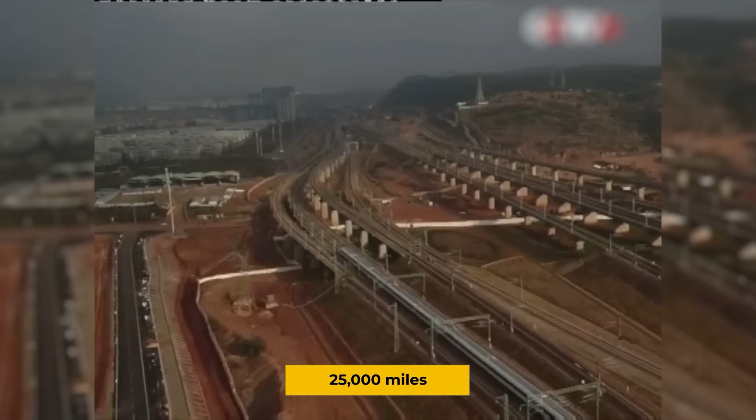Trains still touch tracks, which creates wear, noise, and speed limits. China's current high-speed rail system covers over 25,000 miles, more than the rest of the world combined. But even these trains max out at around 217 miles per hour in regular service. For a country trying to connect cities separated by thousands of miles, that's still too slow.

The economic math is simple: time equals money. Every hour saved in transportation multiplies across millions of passengers. A businessman who can travel from Beijing to Guangzhou in 3 hours instead of 8 can close deals faster and generate more economic activity. Consider the economics: a maglev line between Beijing and Shanghai could move passengers in under 2 hours, versus 4.5 hours on China's fastest conventional high-speed train. Cut travel time in half, and you essentially double the economic productivity of both cities.

The secret to reaching 620 miles per hour isn't just magnetic levitation, it's the vacuum tube system. Most maglev trains still fight air resistance. At high speeds, pushing through air becomes the biggest obstacle to going faster. Think about it this way: a car needs more fuel to go from 60 to 80 miles per hour than from 40 to 60 miles per hour. Air resistance increases exponentially with speed. At 300 miles per hour, air resistance becomes a brick wall. At 600 miles per hour, it's like trying to push through concrete.

China's solution is elegant and ambitious: put the entire maglev system inside a tube with reduced air pressure. Less air means less resistance.

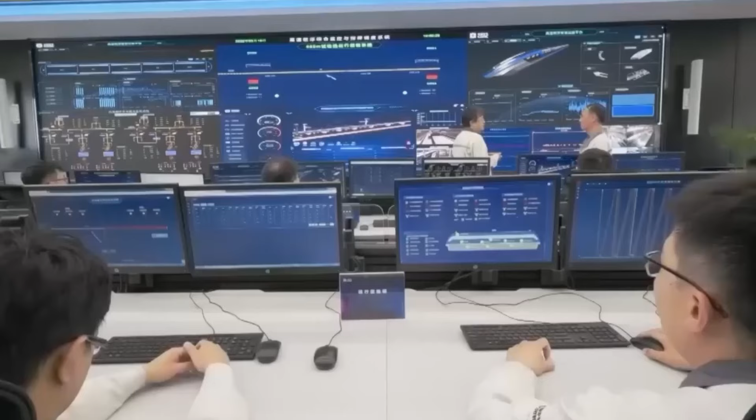Other countries are watching China's maglev development with a mixture of admiration and concern. If successful, this technology could give China a massive economic advantage. Fast, efficient transportation networks drive economic growth. Countries with better infrastructure attract more investment, create more jobs, and generate more wealth.

The United States is taking notice. American companies are exploring their own vacuum tube transportation systems. Elon Musk's Hyperloop concept shares similarities with China's approach, though it uses different technology for levitation and propulsion. Several startups are working on competing systems, but most remain in early testing phases.

The difference is scale and commitment. While American companies test small prototype systems, China is building full-scale infrastructure. They're not just proving the technology works, they're proving it can work at national scale.

Europe is in a difficult position. German companies developed the original maglev technology, but they never built it at the scale China is attempting. European transportation infrastructure is advanced but fragmented across many countries with different standards and regulations.

Japan has its own maglev program. Their system can reach 375 miles per hour and will connect Tokyo to Osaka by 2027. Japanese engineering is world-class, and their safety standards are exceptional. But even Japan's impressive technology looks slow compared to China's 620 miles per hour target.

China understands this dynamic perfectly. They're not just building trains, they're building economic dominance.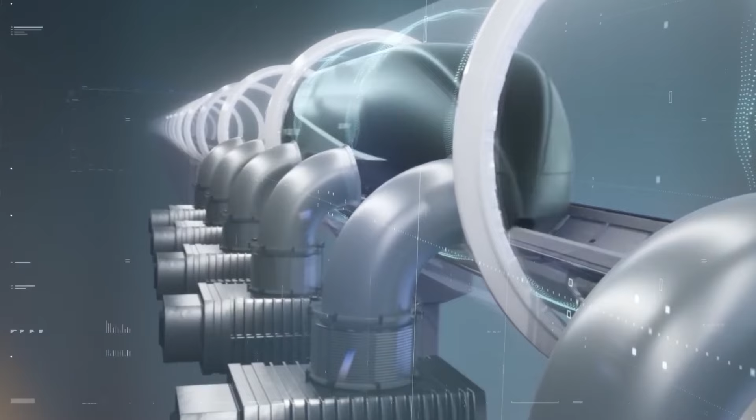Building vacuum tube maglev systems requires enormous upfront investment. Initial cost estimates for China's network run into hundreds of billions of dollars. The Shanghai maglev line cost approximately $1.2 billion for just 19 miles of track. That's roughly $60 million per mile.

But China's government takes a different view. They see infrastructure spending as long-term economic investment. A maglev network that lasts 50 years and transforms transportation across the country justifies massive initial costs. The economic benefits compound over decades.

Traditional cost-benefit analysis doesn't capture the full value of revolutionary infrastructure. When the interstate highway system was built in America, critics called it wasteful spending. Decades later, economists estimate it generated economic benefits worth trillions of dollars.

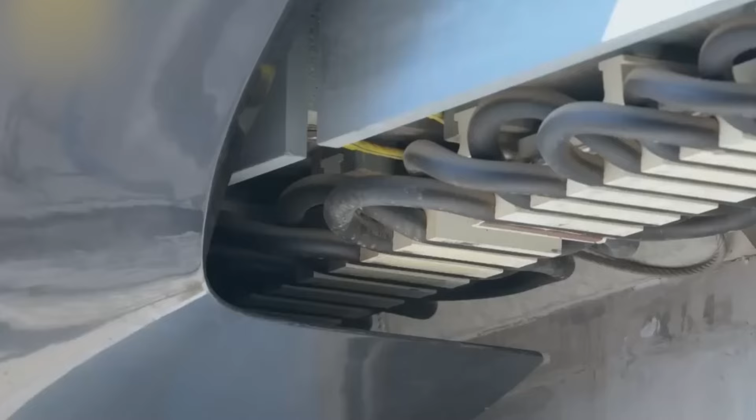China also benefits from scale economics. They're building multiple maglev lines simultaneously, spreading development costs across many projects. Manufacturing components in large quantities reduces per-unit costs. The government financing model makes ambitious projects possible that would be impossible under pure market economics.

Despite the impressive progress, vacuum tube maglev technology faces significant challenges. Maintaining low air pressure across hundreds of miles of tube requires constant energy input. The vacuum pumps alone consume enormous amounts of electricity. Engineers estimate that maintaining partial vacuum could require the output of multiple power plants.

Safety systems become more complex when trains travel at 620 miles per hour in sealed tubes. At that speed, a train travels more than 900 feet per second. Traditional braking systems can't handle these speeds safely. Emergency stops from maximum speed could take several miles and generate dangerous heat levels.

Weather impacts create additional complications. Temperature changes cause tube expansion and contraction. A temperature swing of 100 degrees could cause miles of tube to expand by several feet. That's enough to misalign the magnetic levitation system.

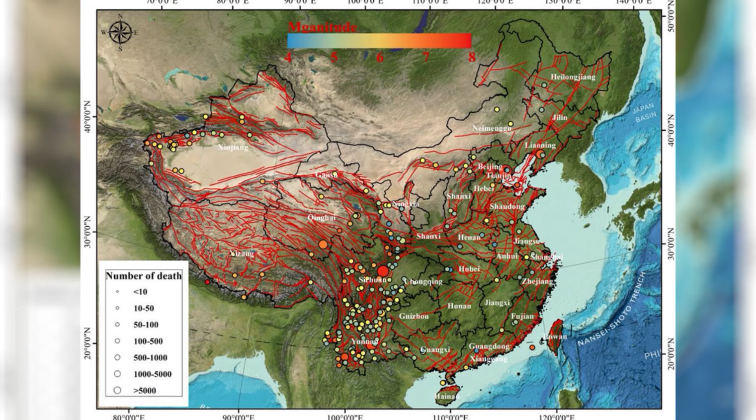Earthquake zones need special engineering to prevent track misalignment. Even small movements could cause the levitation system to fail. China's engineers are addressing these challenges through extensive testing and redundant safety systems. But every solution adds complexity and cost to the overall system.

China's 620 miles per hour maglev represents more than transportation technology. It's a statement about technological leadership and economic ambition. The country that masters ultra-high-speed ground transportation could gain decisive advantages in the 21st century economy.

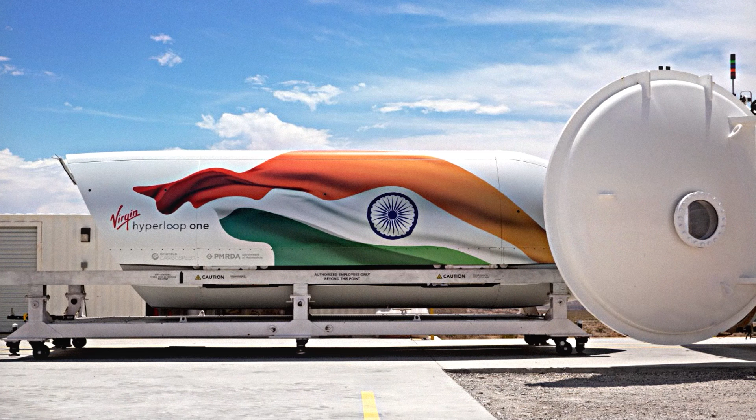Other nations are responding with their own ambitious projects. The competition is driving innovation across multiple technologies: magnetic levitation, vacuum systems, power electronics, and advanced materials. This technological race benefits everyone through faster development and better solutions. India announced plans for its own Hyperloop system connecting major cities. Saudi Arabia included Hyperloop connections in its futuristic city projects.

Russia announced research into vacuum tube transportation systems connecting Moscow to distant regions. Even developing nations don't want to be left behind in this race.

The implications extend beyond transportation. Vacuum tube technology has applications in cargo transport and industrial processes. Magnetic levitation could revolutionize manufacturing and energy storage. The innovations developed for 620-mile-per-hour trains will likely find uses in completely different industries.

China understands these broader implications. They're not just building infrastructure, they're building the foundation for future dominance across multiple sectors. The maglev project is part of a larger strategy to lead the world in advanced technologies.

But there's something else happening that most people haven't noticed yet. Something that could make even a 620-mile-per-hour train look like old technology. And it's already being tested in a secret facility just outside Beijing.

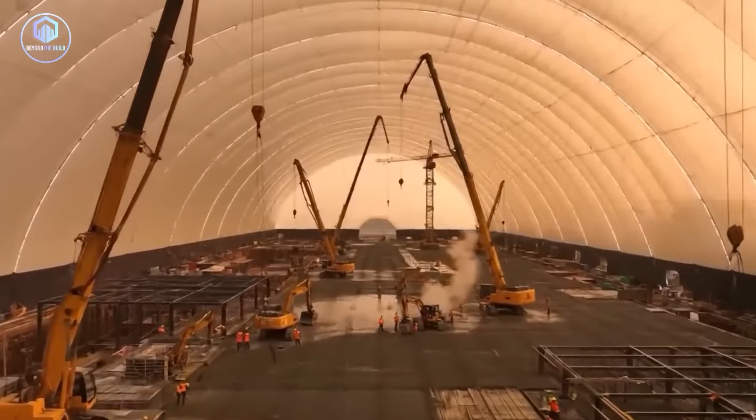A massive white bubble, taller than a 15-story building, suddenly appears over a construction site in China. Workers inside are building the future, while the outside world hears nothing. No dust clouds choking nearby residents, no thunderous machinery waking families at dawn.

This is not science fiction. This is China's latest weapon in the war against construction pollution, and it might just change how the world builds forever. China builds more in a single year than most countries construct in a decade.

Since 2012, building construction funding has increased by 30%. Subway systems are expanding 5 times faster than any other nation. By 2020, China had built 8,000 kilometers of new subway lines alone.

But this construction boom comes with a dark side. In major Chinese cities, construction noise accounts for over 25% of all noise complaints. Beijing residents face average noise levels exceeding 70 decibels.

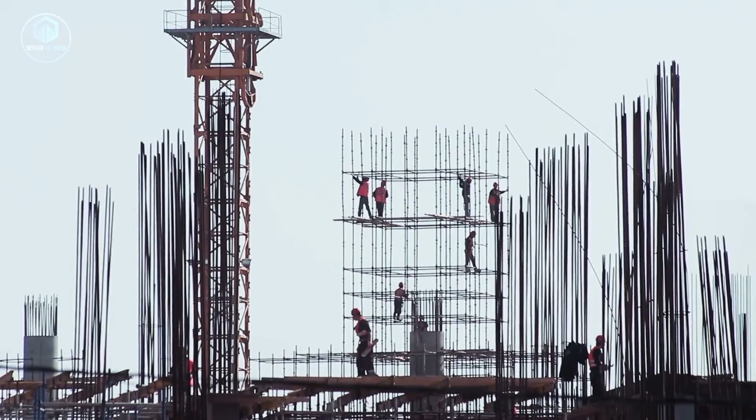The health impact is severe. Studies show construction noise causes cardiovascular disease, sleep disorders, and cognitive problems. Children and elderly populations suffer the most.

Construction dust pollution creates another crisis. Heavy metals like zinc, chromium, and lead contaminate the air around building sites. These particles spread for miles, affecting air quality in residential areas. Research shows that construction dust contains dangerous levels of PM 2.5 particles, the same pollution that causes respiratory disease.

Enter Jinan, the capital of Shandong province. City officials decided to tackle this problem with something the world had never seen. In July 2025, they unveiled a 50-meter-tall inflatable dome covering 20,000 square meters. This structure is not just big, it is revolutionary.

The dome uses no internal supports, no columns, no beams. Instead, it relies on constant air pressure to maintain its shape. Made from PVDF-coated polyester, the material is fire-resistant and can withstand extreme weather. 38 steel cables anchor it to the ground, creating a stable platform for construction work.

Inside, advanced ventilation systems manage air quality. Transparent sections allow natural light to enter, reducing the need for artificial lighting. Temperature and pressure sensors regulate air circulation. At exhaust points, water misting systems capture airborne particles, dramatically reducing dust emissions compared to open-air construction sites.

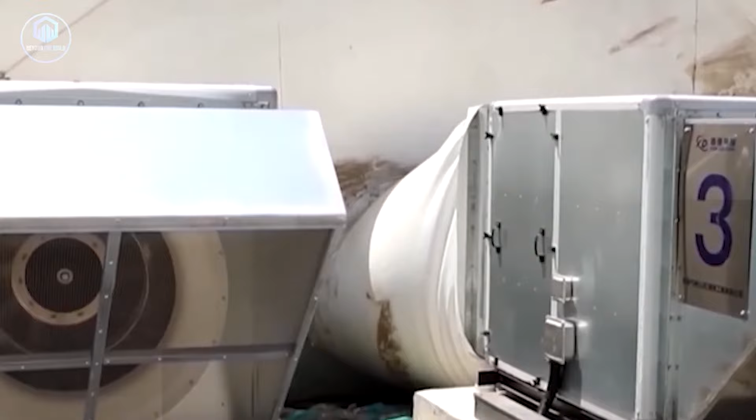Creating a structure this large requires precise engineering. The dome maintains its shape through continuous air pressure systems. Multiple air pumps work around the clock, ensuring stability. The membrane material must be strong enough to resist wind loads while remaining flexible enough to inflate.

Weather resistance was crucial. The dome must function during rain, snow, and extreme temperatures. Engineers designed the material to expand and contract without losing structural integrity. This flexibility allows the dome to withstand typhoons and harsh winter conditions common in northern China.

Installation takes just days, not weeks. The modular design means the dome can be quickly assembled, inflated, and secured. When construction finishes, the entire structure can be dismantled and moved to another site. This reusability makes it cost-effective compared to traditional noise barriers.

Local residents noticed immediate changes. Air quality measurements show significant improvement in dust levels around the construction site. Workers inside the dome report better working conditions. The controlled environment protects them from extreme weather, allowing construction to continue during rain and snow. The interior remains cooler in summer and warmer in winter, improving productivity and safety.

The dome creates a unique construction environment. Without wind interference, precise work becomes easier. Material handling improves because dust does not blow around the site. Equipment operates more efficiently in the controlled atmosphere.

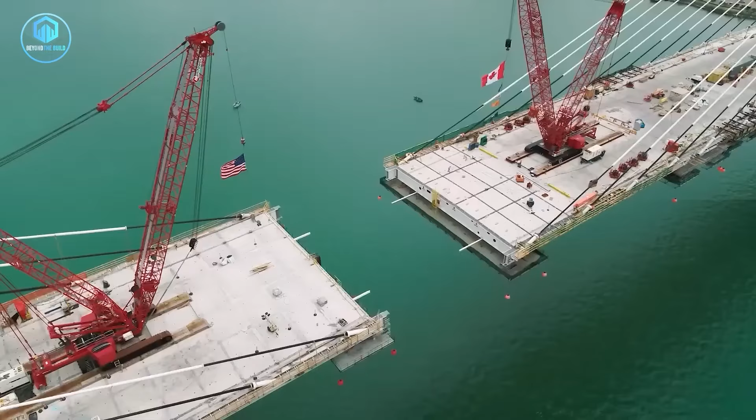China's construction pollution problem mirrors challenges worldwide. India's major cities face similar issues with construction dust and noise. Mumbai, Delhi, and Bangalore all struggle with building-related air pollution. European cities like London and Paris have implemented strict construction noise regulations, but enforcement remains difficult. The United States spends billions annually on construction-related health costs. The Occupational Safety and Health Administration has established exposure limits for construction dust, but monitoring remains challenging.

Urban density makes the problem worse as more people live closer to construction sites. This innovation addresses more than environmental concerns. Construction delays caused by noise complaints cost developers millions, and legal disputes over environmental violations create additional expenses. The dome system reduces these risks by containing pollution at the source.

Project timelines improve because weather delays decrease. Rain and snow no longer stop construction work. This efficiency translates to faster project completion and reduced costs. Developers can work longer hours without disturbing nearby residents.

The reusable nature of the dome creates economic advantages. Traditional noise barriers and dust control systems are often single-use, but the inflatable dome can move from project to project, spreading costs across multiple construction sites.

Beijing has already begun testing similar technology in the Lize financial district. City officials offer incentives for builders adopting gas membrane systems. Shanghai and other major cities are watching the Jinan experiment closely.

International interest is growing. Indian cities are studying the technology as a solution to their construction pollution problems, and European engineering firms are analyzing the dome's design for potential adaptation. The technology could spread globally if proven effective.

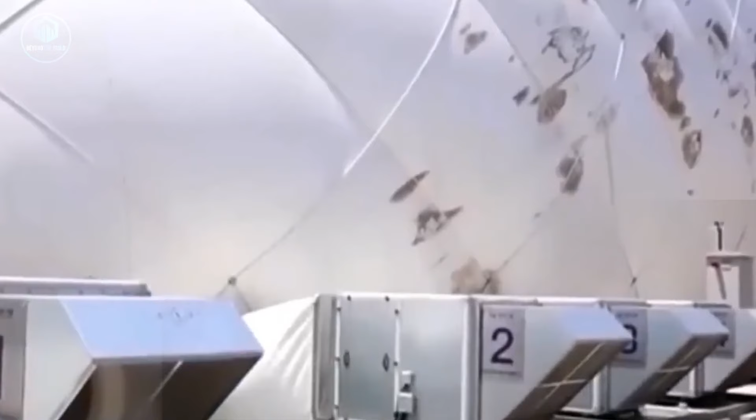The dome represents broader trends in construction technology. Smart sensors monitor air quality in real time, and automated systems adjust ventilation based on activity levels. This integration of technology and construction points toward future building methods.

Not everyone embraces this innovation. Some experts worry about heat buildup inside the dome during summer months. Professor Liu Wei, an environmental engineer, warns of potential heat stress risks for workers, as the enclosed space could become dangerously hot without proper ventilation.

Cost remains a significant factor. The dome system requires substantial initial investment, and smaller construction projects may not justify the expense. Questions remain about long-term maintenance costs and replacement schedules.

Critics argue the dome only shifts pollution rather than eliminating it. While dust and noise stay contained, the underlying environmental impact of construction continues. The dome does not address material waste or energy consumption during building.

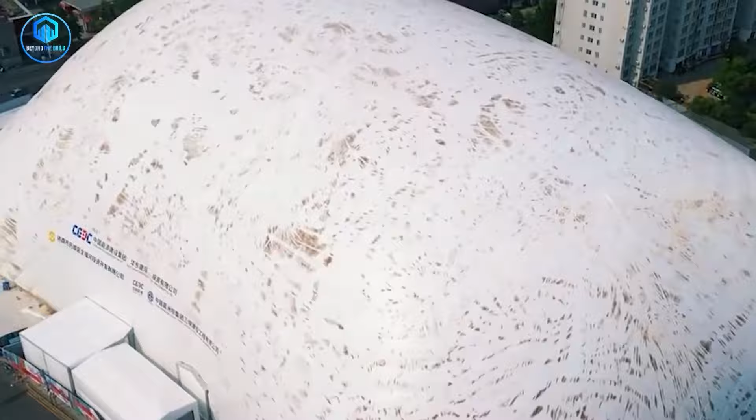This innovation reflects China's approach to urban development challenges. Rather than accepting construction pollution as inevitable, Chinese engineers created a technological solution. This mindset drives innovation in other areas of infrastructure development.

The dome connects to China's broader environmental goals. The country aims for carbon neutrality by 2060. Reducing construction pollution supports these objectives while maintaining rapid urbanization. The technology demonstrates how environmental protection and economic development can align.

Smart city initiatives benefit from this innovation. Cleaner construction processes support the development of sustainable urban environments. The dome technology could become standard equipment in future smart city projects.

The Jinan dome might represent the beginning of a construction revolution. Imagine every major building project enclosed in a smart, responsive dome. Construction sites could become clean, quiet, and efficient workspaces, and urban residents would no longer suffer from building-related pollution.

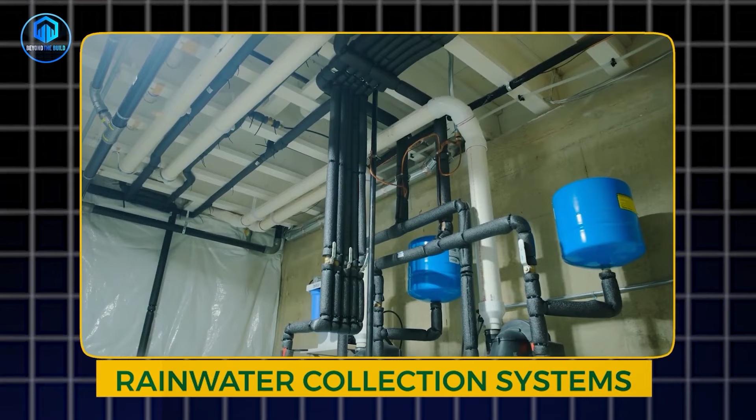Advanced versions could integrate even more technology. Solar panels on the dome surface could power construction equipment, and rainwater collection systems could provide water for dust suppression. The dome could become a self-sufficient construction environment.

International adoption would create a global market for this technology. Chinese manufacturers could export dome systems worldwide. This technology transfer would generate economic benefits while improving global construction practices.

Other countries are developing alternative solutions. Japanese companies are creating robot-operated construction systems that reduce human exposure to dust and noise. European firms are designing modular construction methods that minimize on-site work, while the United States is investing in prefabricated construction technologies. These systems reduce on-site construction time and associated pollution. However, none match the comprehensive approach of the Chinese dome system.

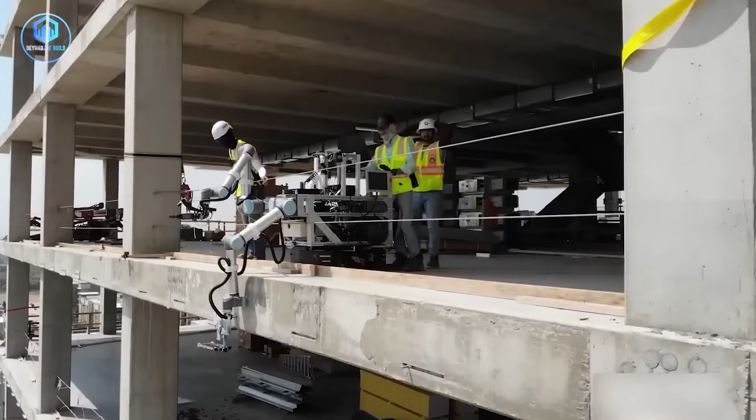The race for construction innovation is accelerating. Countries that develop effective solutions will gain economic advantages in the global construction market. The Jinan dome positions China as a leader in this emerging field. The success or failure of this experiment will influence urban development worldwide.

If the dome proves effective and economical, it could become standard practice in major cities, and construction pollution could become a problem of the past. However, if the system fails or proves too expensive, it could set back efforts to address construction pollution. The global construction industry will watch closely to see if this innovation delivers on its promises.

The stakes extend beyond environmental concerns. This technology could determine which countries lead the next generation of urban development. The dome represents more than pollution control. It symbolizes the future of how humans build cities.